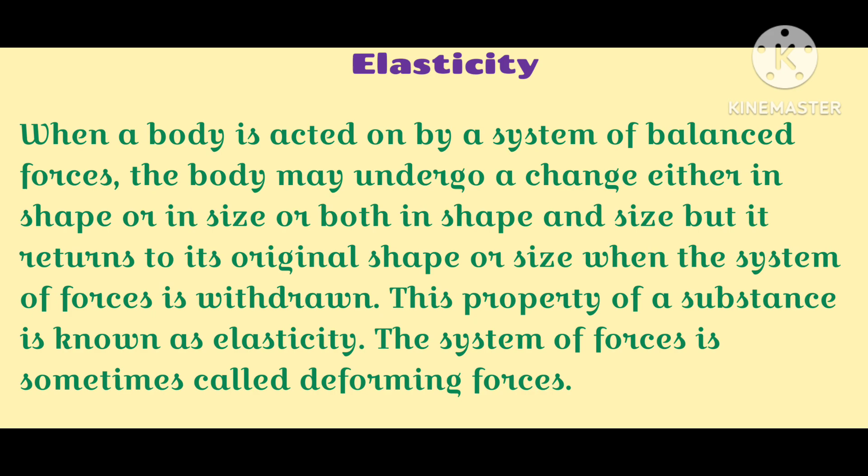Let's now get familiar with some important definitions in connection with elasticity. Strain: whenever a system of forces in equilibrium act on a body, the forces do not produce any bodily motion, but produce a relative displacement of the various particles of the body, causing a change of shape or size or both. This change is generally called the deformation or strain of the body.

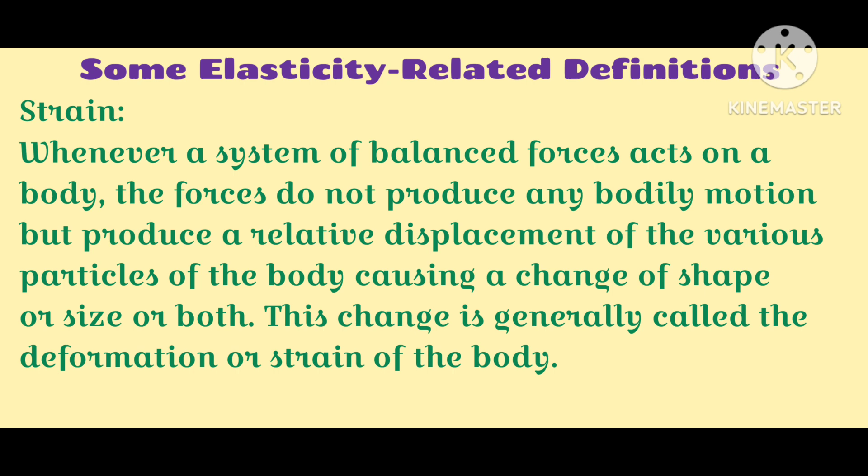How can we measure strain? Well, it is measured by the ratio of the change in the configuration to the original configuration.

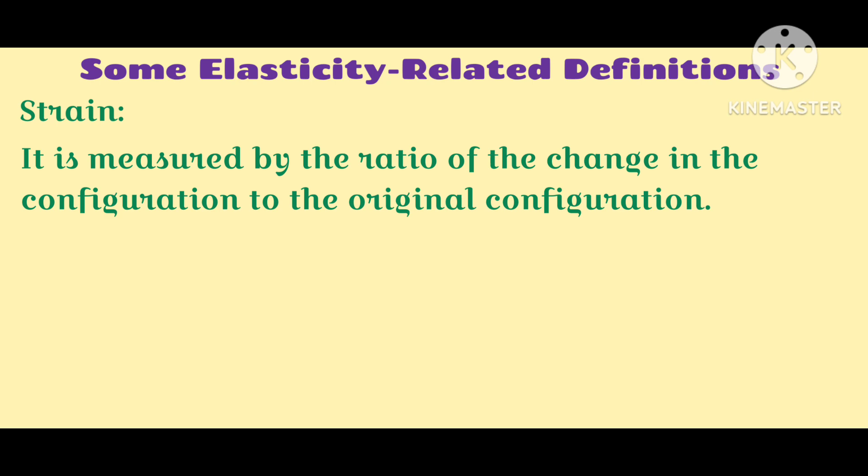Stress: when a relative displacement of various parts of a body takes place on the application of a system of deforming forces, a resisting force is called into play inside the body, tending to bring it back to its unstrained condition. This restoring force is called stress.

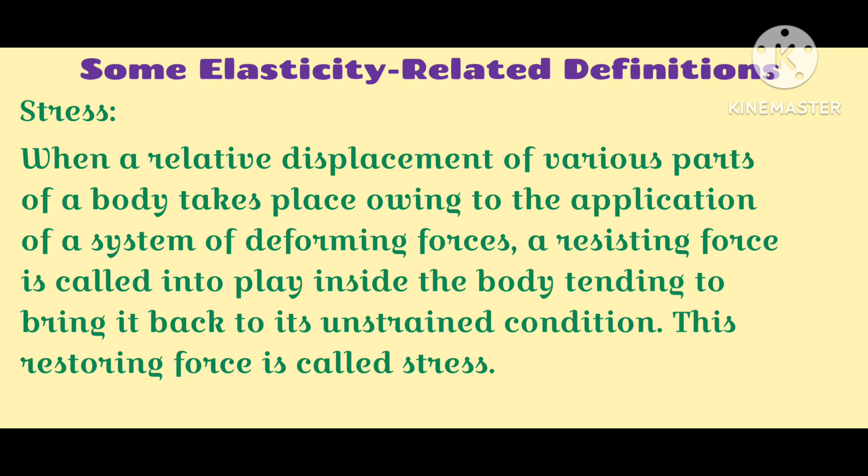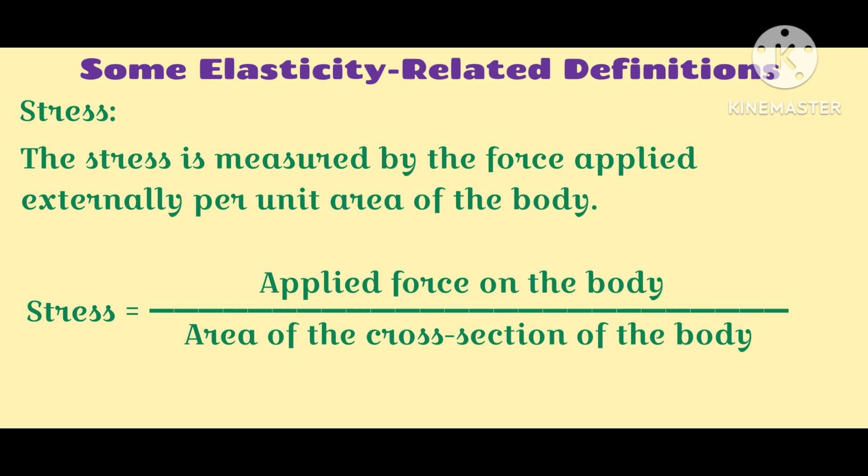Stress is measured by the force applied externally per unit area of the body. Let's consider the applied force to be inclined to the surface of the body. The component of the force normal to the surface per unit area is called normal stress. On the other hand, the component along the surface per unit area is known as the tangential or shearing stress.

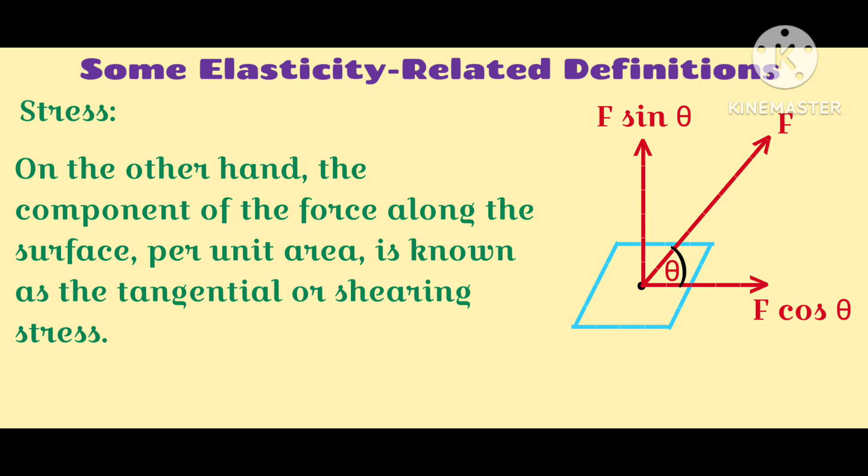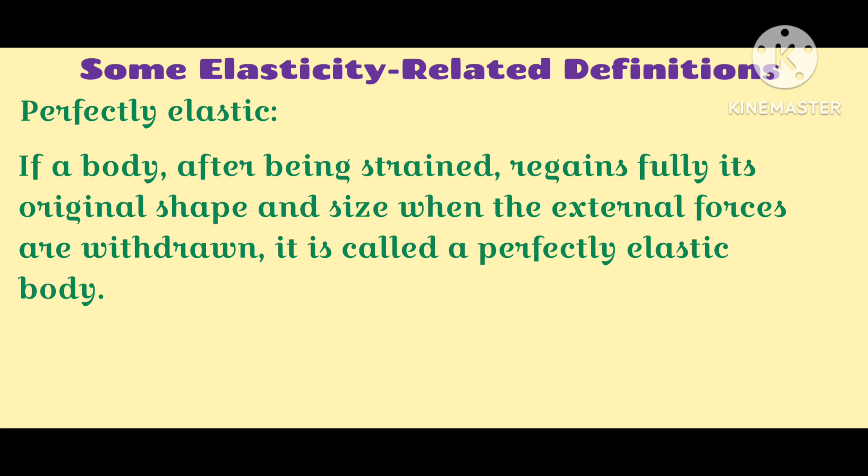Perfectly elastic: if a body after being strained regains fully its original shape and size when the external forces are withdrawn, it is called a perfectly elastic body. Perfectly rigid: a body will be called perfectly rigid if it does not suffer any strain under any amount of stress. No substance is perfectly rigid, though glass is a very close approach to it.

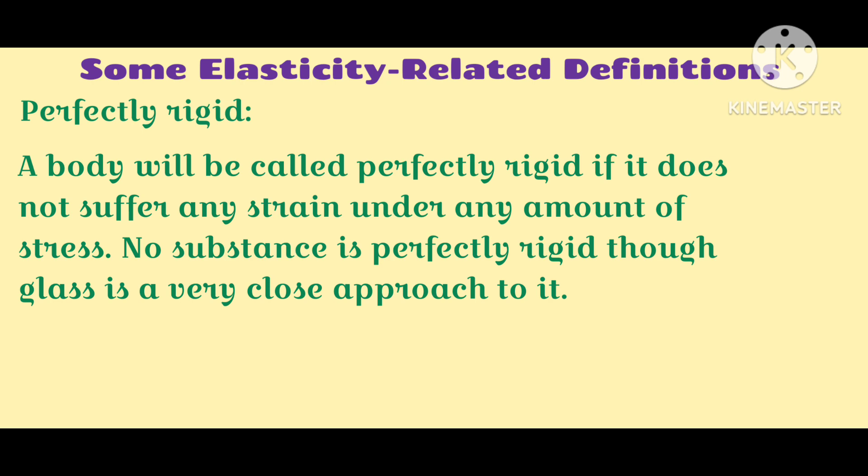Perfectly inelastic: a body is said to be perfectly inelastic or plastic if it retains its changed configuration even after the removal of the external force, however large it may be.

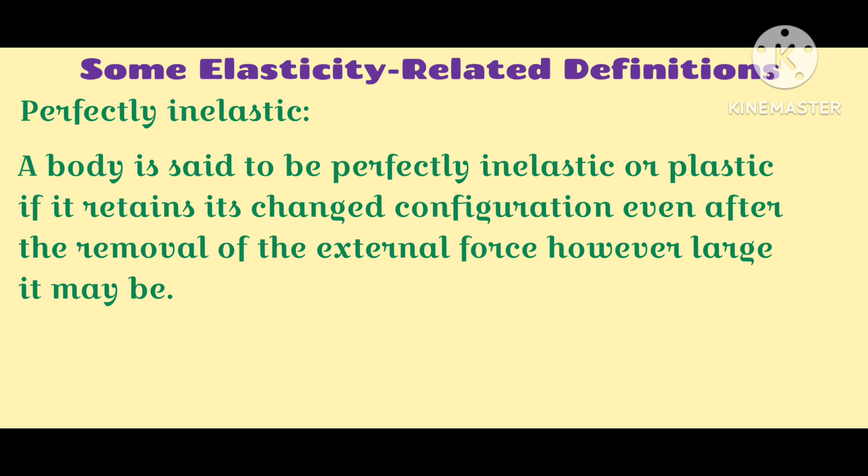Partly elastic: in the practical world, we neither find perfectly inelastic nor perfectly elastic bodies, but partly elastic bodies are readily found. A body is said to be partly elastic when, after the removal of the external forces, the body regains only a part of its original configuration.

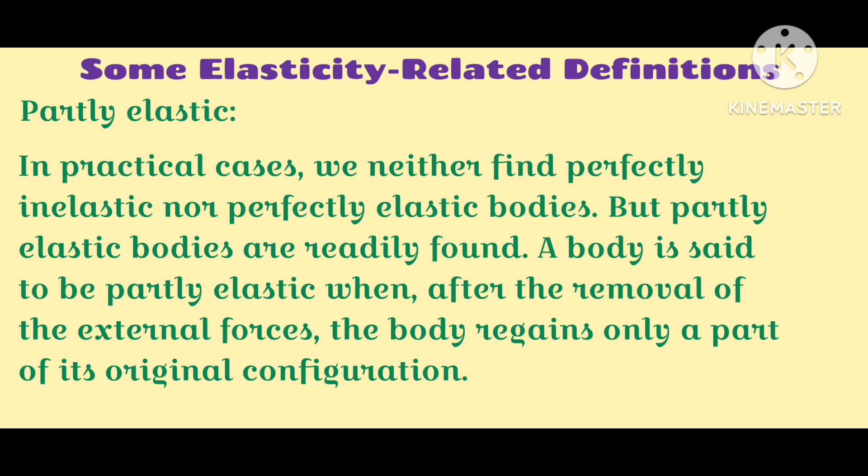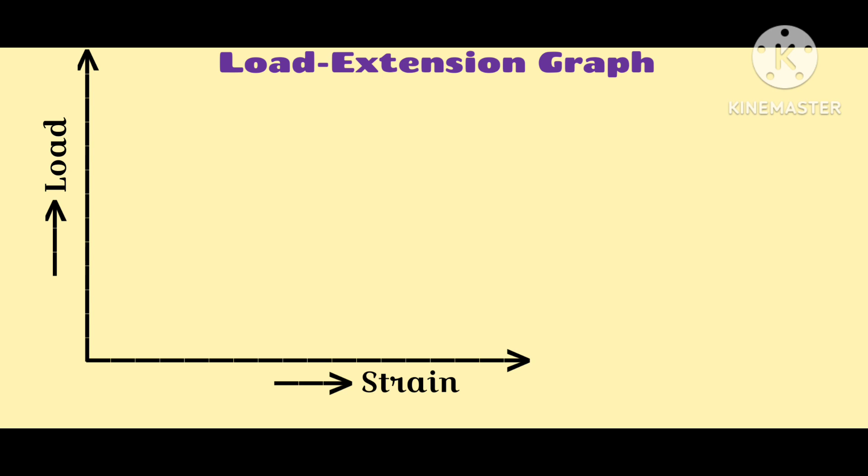To study the elastic behavior of a solid material, generally a wire of the material is taken and gradually increasing loads are put at one end of the wire, the other end being rigidly fixed to a stout support. Due to the loads, extensions in the length of the wire will take place, and a graph drawn between the load and extension so produced provides us an easy means of studying the elastic properties of the material.

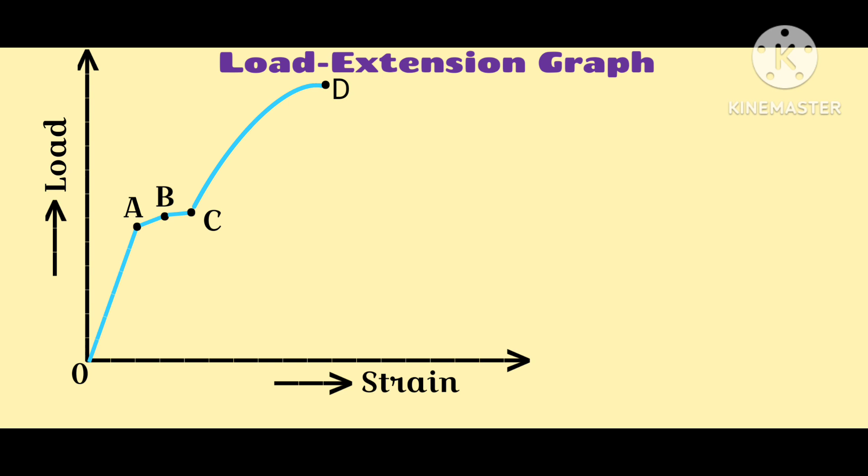The figure on the screen shows such a load-extension graph for a solid material. It is seen that the portion of the curve from point O to point A is straight. It means that the extension is proportional to the load.

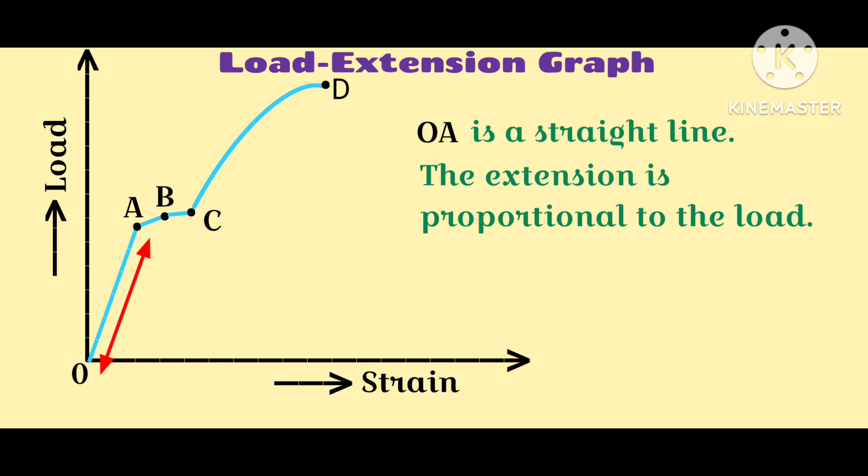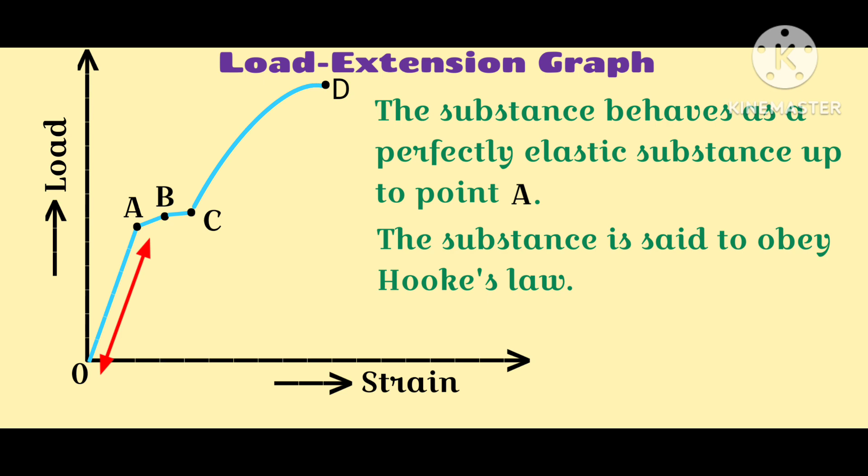If at any point between O and A the load is removed, the wire returns to its original state. So the substance behaves as a perfectly elastic substance up to point A, obeying Hooke's law up to that point. Along OA, the wire is said to undergo elastic deformation.

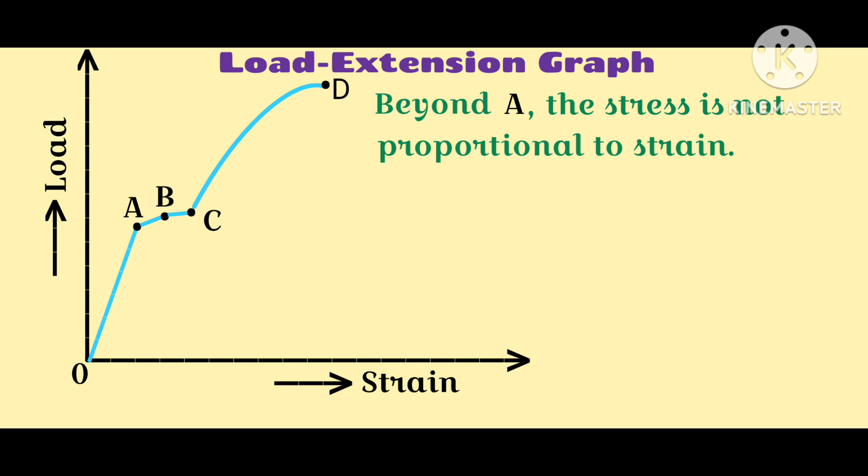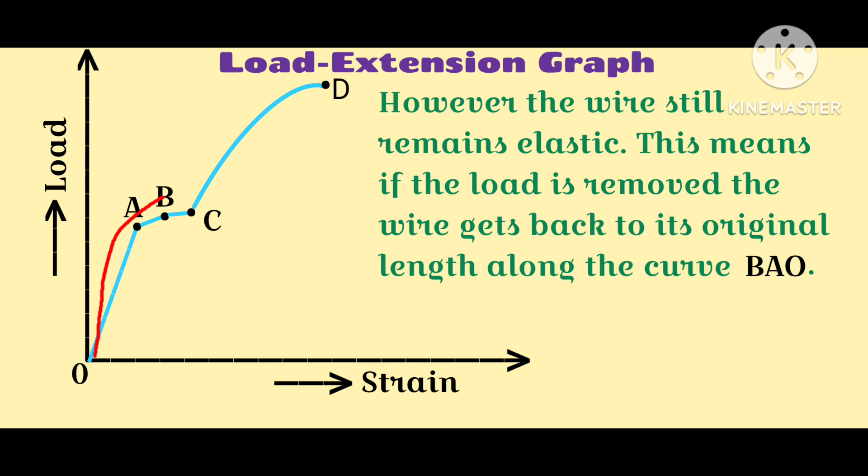Loading a little beyond A, the stress is not proportional to strain, but the wire still remains elastic. This means if the load is removed, the wire gets back to its original length along the curve BAO. This behavior is shown up to a point B on the curve, called the elastic limit or yield point.

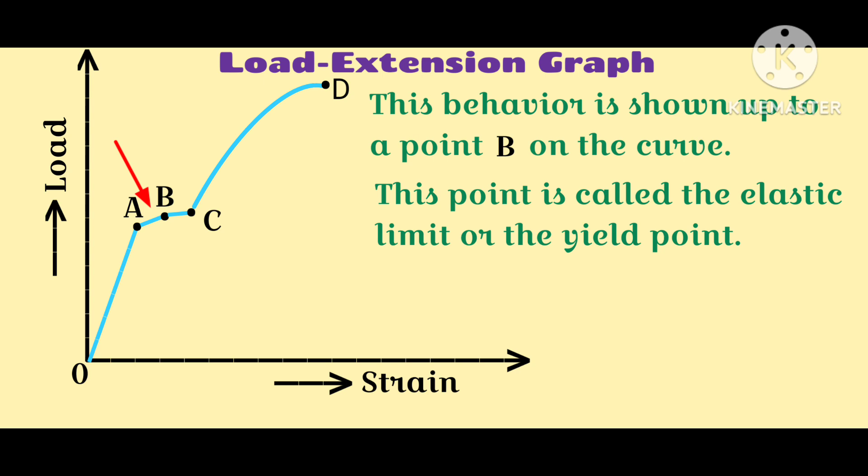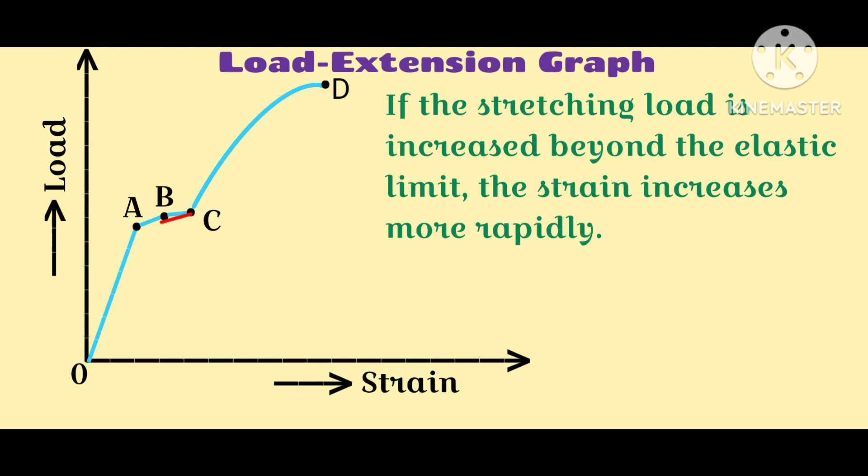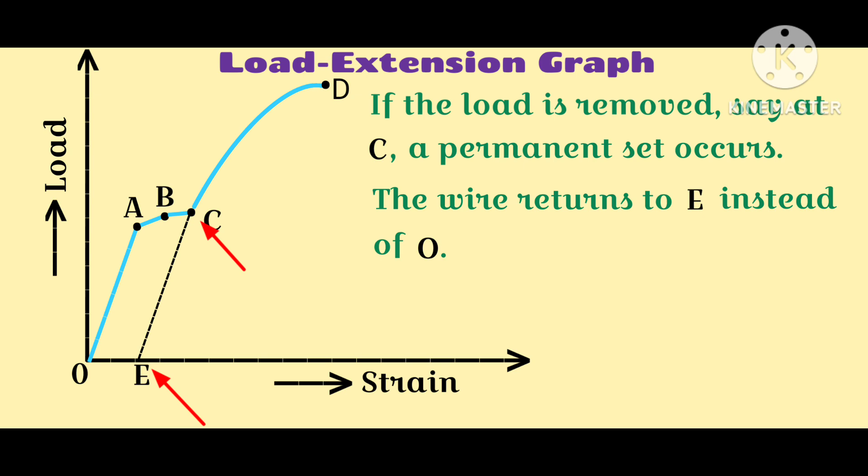If the stretching load is increased beyond the elastic limit, the strain increases more rapidly. If the load is removed, say at point C, a permanent set occurs, and the wire returns to point E instead of point O. OE measures the permanent extension. Under these circumstances, the material becomes plastic.

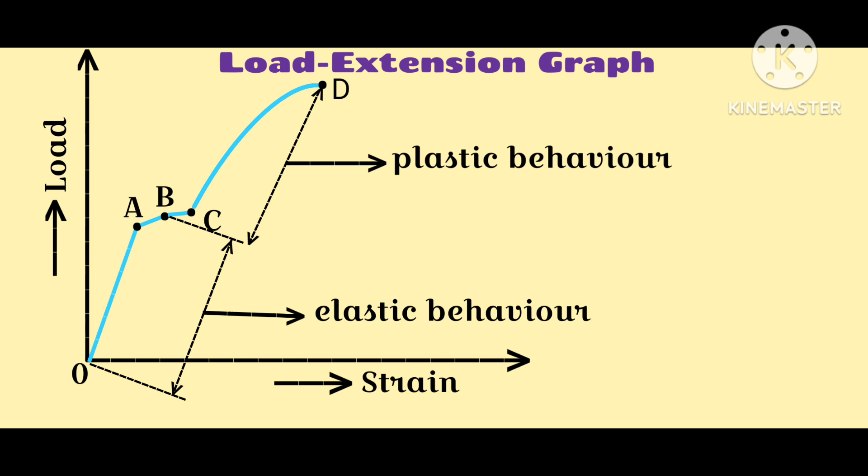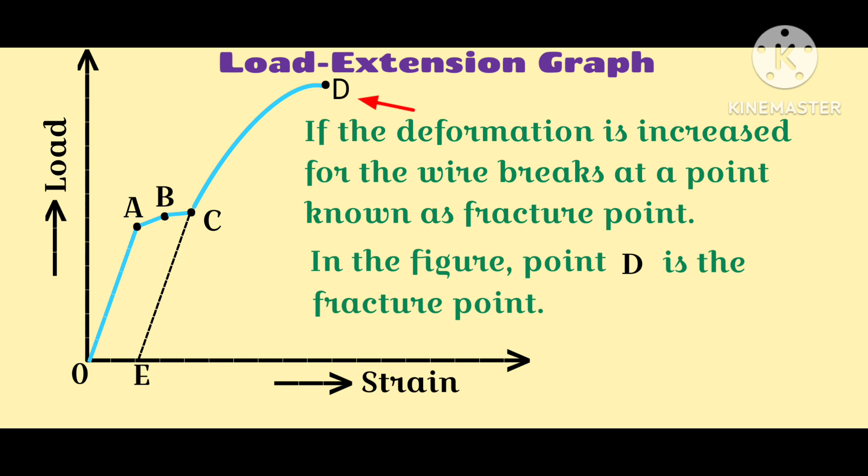If the deformation is increased further, the wire breaks at a point known as the fracture point. In the figure, point D represents the fracture point. The stress corresponding to the fracture point is called breaking stress.

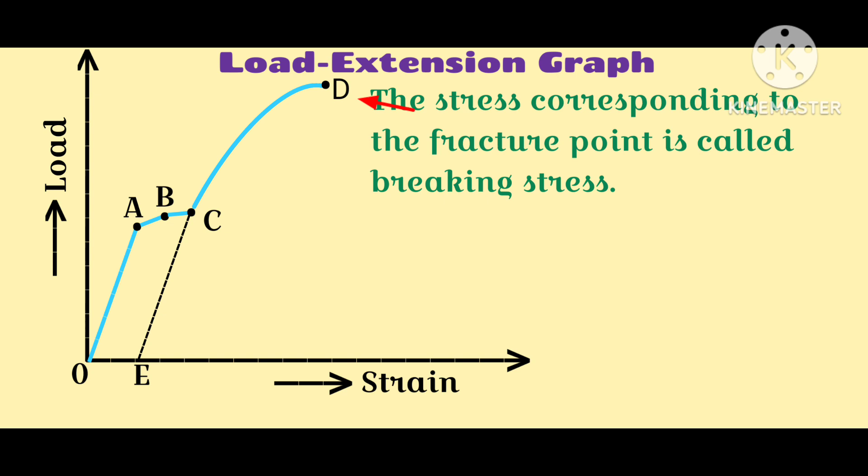Brass, bronze, and many other alloys, however, seem to have no fracture point. These materials increase in length beyond the elastic limit as the load is increased, without the appearance of the plastic stage.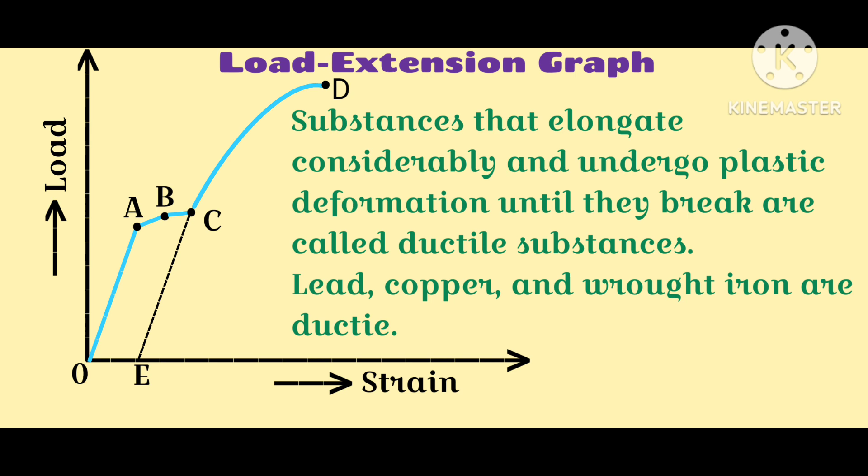Substances that elongate considerably and undergo plastic deformation until they break are called ductile substances. Metals like lead, copper, and wrought iron are ductile. Other substances, however, break just after the elastic limit is reached; they are known as brittle. Glass and high carbon steels are brittle.

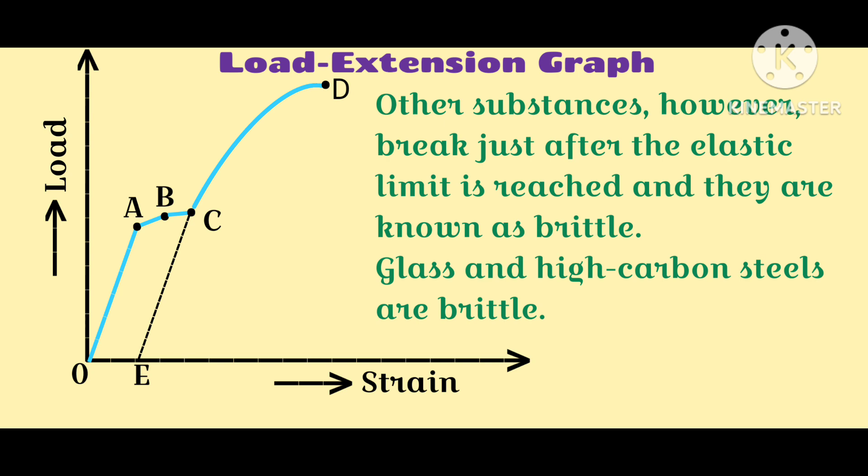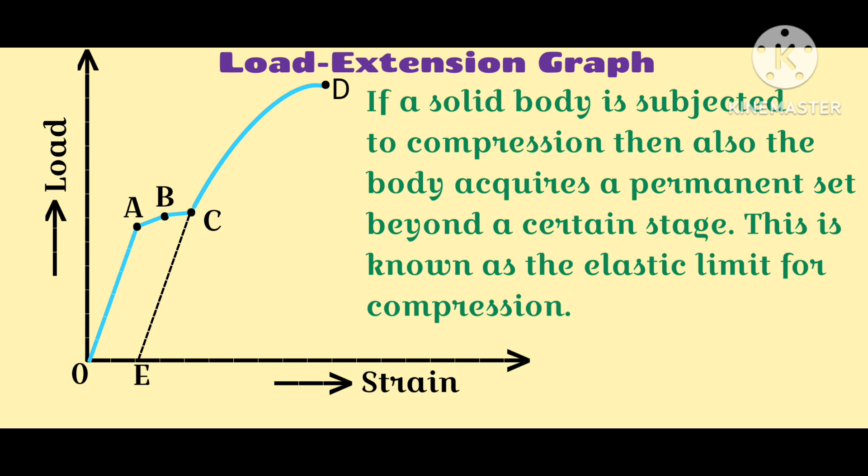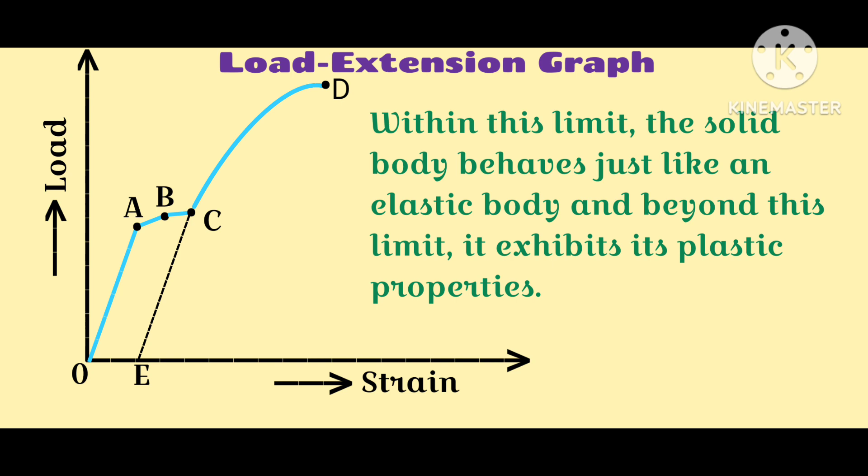When a solid body is subjected to compression, it also acquires a permanent set beyond a certain stage, known as the elastic limit for compression. Within this limit, the solid body behaves just like an elastic body, and beyond this limit it exhibits its plastic properties. The yield point in the case of compression is called the crushing point, which occurs if the compression is increased beyond the elastic limit.

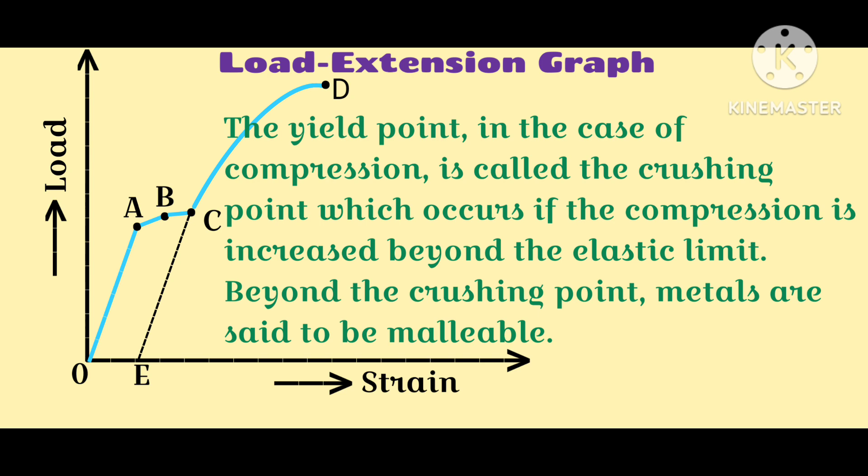Beyond the crushing point, metals are said to be malleable, and can be hammered into flat sheets. Gold is said to be one of the most malleable metals ever found.

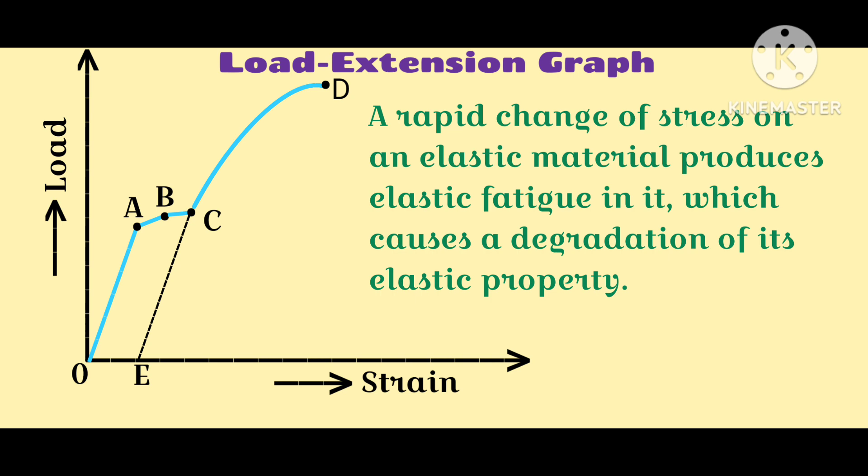A rapid change of stress on an elastic material produces elastic fatigue in it, which causes a degradation of its elastic property. The material may then break or snap at a stress less than the normal breaking stress, or even at a load within the elastic limit.

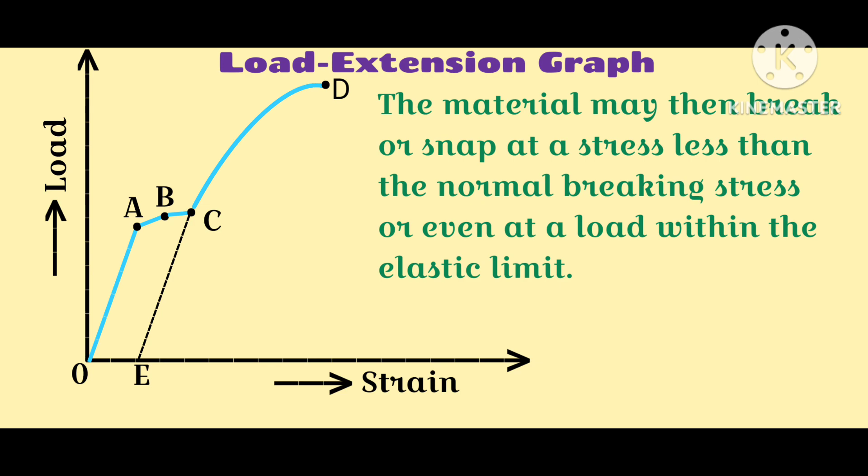Hooke's law states that within the elastic limit, the stress applied is directly proportional to the strain produced. This law was established by Robert Hooke in 1678. According to this law, within the elastic limit, the ratio of stress to strain is a constant, known as the modulus of elasticity.